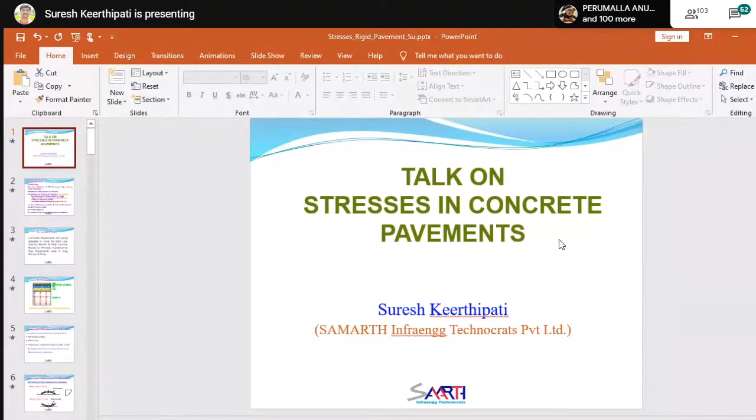Are you seeing my presentation? Yes, Suresh, but you just need to put it in slide show mode. Yes, now okay, fine, good. Go ahead.

I'm going to present only on the stresses in concrete pavements due to various load conditions like self-weight of the slab, temperature variation - nothing but temperature gradients from the top of the slab to the bottom of the slab - and the third one was wheel loads.

So in this presentation: the introduction and structural behavior of concrete pavements under various load conditions, then the methods of how to compute and find out the stresses in concrete pavements, and then the latest developments of the computer program KGP Slab 2 with finite element modeling using 8-noded and 20-noded elements, and how that performs.

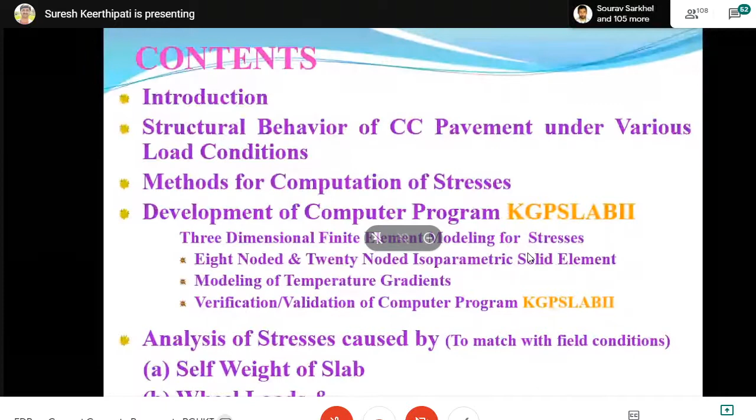And the modeling of temperature gradients. Finally, after the computer program is completed, generally when software is developed, they will do testing. In the same way, here we need to test and validate the computer program which we've written, and then finally analyze the stresses which actually correlate to the field conditions. So these are the topics mainly I'm covering in this presentation.

So coming to the introduction, nowadays concrete pavements are used in both low volume roads and high volume roads to provide maintenance-free pavements over a long period of time. Maintenance-free means maybe a period of 5 years, 7 years, or 10 years. Compared to flexible pavements, maintenance will be very less in rigid pavements, and no maintenance for long periods. So people are preferring to go with concrete pavements nowadays widely in the country.

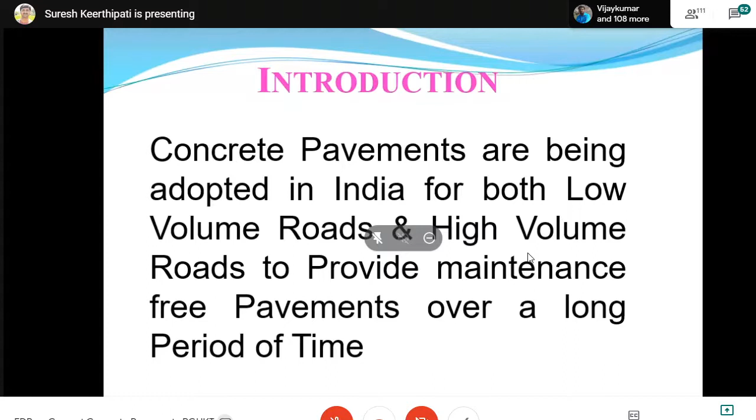Various state governments, central government, or private agencies are also doing this. So here I'm presenting a typical crust which is normally used in high volume roads.

There will be a subgrade of 500 mm compacted to the compaction levels specified in the guidelines, and over that a drainage layer, which is the most important layer, called GSB, granular subbase. Over the top is a DLC layer because we require a strong foundation beneath the PQC to stand alone without any deflections or deformations. And over the top, we provide a separation membrane.

125 microns, you call it a plastic sheet generally. Over the top, we are laying the PQC, rigid pavement of 250 mm to 300 and 320 mm. Because of this separation membrane, frictional stresses will reduce.

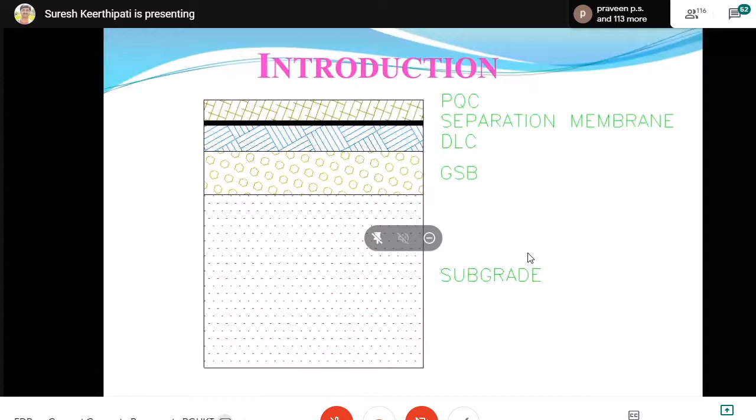A separation membrane is introduced between the concrete pavement and the DLC. Coming to the structural behavior of concrete pavements with various load combinations, firstly we need to take care of the self-weight of the slab, how it affects the concrete structural behavior. The second one is wheel loads - under wheel loads, how the CC pavements will behave. Third is temperature variation through the depth of the slab, which is nothing but a temperature gradient, not the temperature differentials.

This is the temperature gradient along the depth of the slab - the top, what is the temperature, and the bottom of the slab, what is the temperature - the difference is called a temperature gradient. The fourth one is shrinkage of concrete at early age of construction, and fifth is volume changes in foundation. These last two have less influence on the stresses in the concrete pavement, so we are neglecting these two in this discussion and focusing only on the top three.

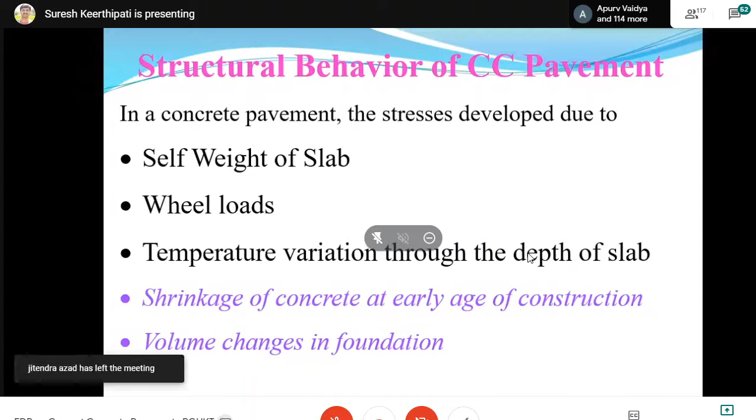These are diagrams - there is always a temperature gradient in the slab. During daytime, nighttime, at any point of time, the slab will curl upward or downward, or sometimes remain in full contact with the foundation or subgrade. During daytime curling, it will be convex upward due to self-weight - self-weight will always be pulling the slab down. Because of this, there is compression on the top and tension on the bottom. This is due to the temperature gradient.

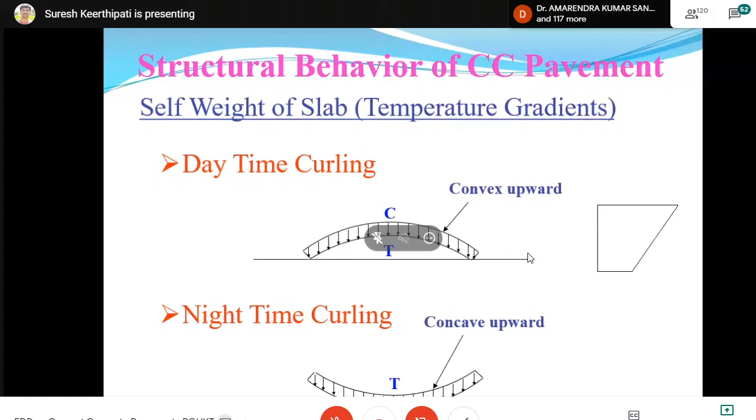The slab will warp like this during the daytime. Coming to nighttime curling, because of temperature drops, the top of the slab will have less temperature compared to the bottom. Then the slab will warp concave upward - just reverse of the daytime case. This is nighttime curling. So temperature will always be there, and because of the self-weight of the slab, stresses are generated at the top and bottom of the slab.

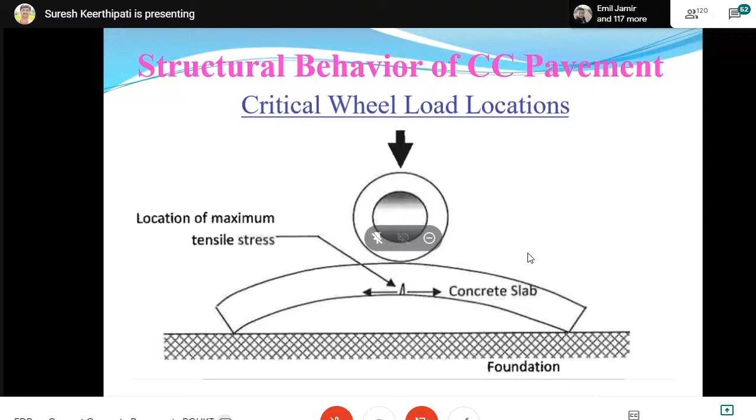Here also, temperature gradients are always present on the concrete slab. I'm looking only at the critical wheel load location - wheels placed exactly at the center of the slab. This is the critical case for bottom cracking during daytime - tension at the bottom, compression on the top. During nighttime, the slab will curve upward, and these are the two critical load locations - if placed here, cracks will occur here. So tension will be on top and compression on the bottom.

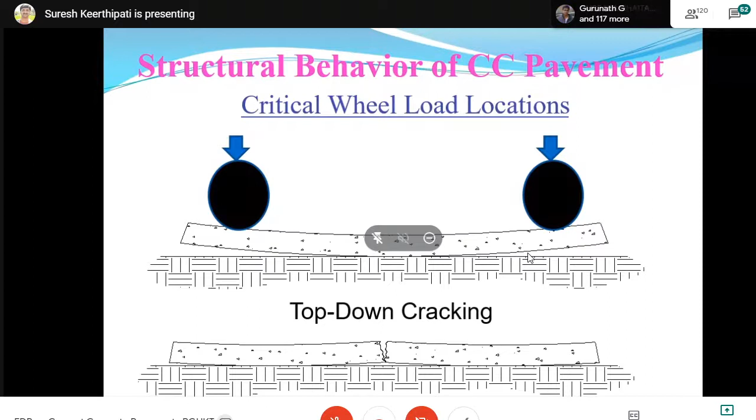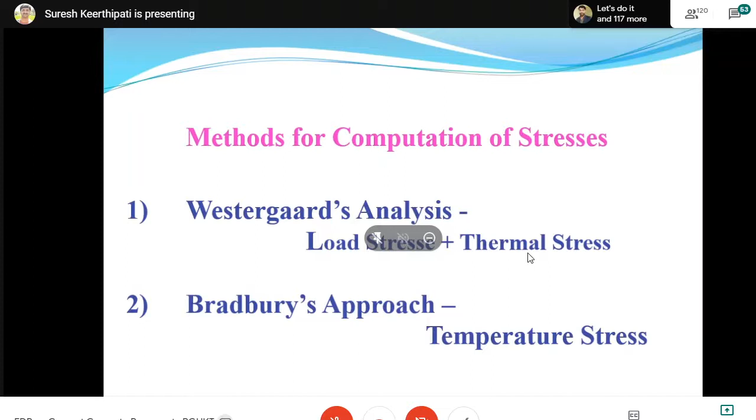So first I will go with the Westergaard analysis for load stresses. What are the limitations and assumptions he made in the analysis? First, he assumed the thickness of the slab is constant, and second, each panel of the pavement is assumed to be fairly large and as yet uncracked - he took long and broad slabs that are uncracked. And the load is assumed in no case to be close to more than one edge or joint, only at one edge or joint.

Other edges or joints are assumed to be far enough away to have only a negligible influence on the stresses directly under the load. This is one of the important assumptions taken. And the third one is that the subgrade is always in full contact with the slab.

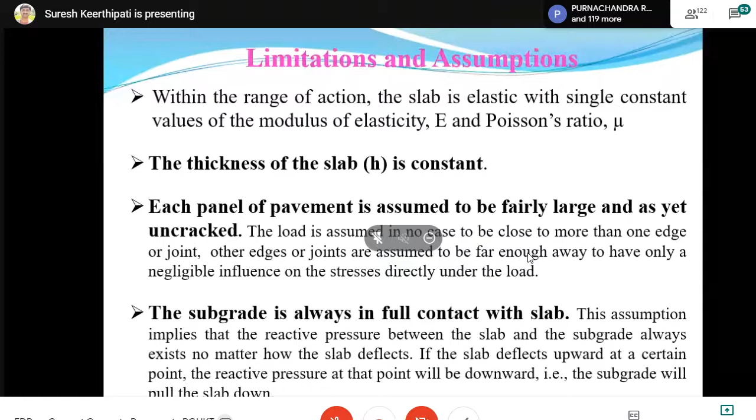This assumption plays a major role in the Westergaard equations. But practically, when the slab warps up or warps down, some portion of the slab loses contact with the subgrade or foundation. So this assumption implies that the reactive pressure between the slab and the subgrade always exists, no matter how the slab deflects. If the slab deflects upward at a certain point, the reactive pressure at that point will pull it downward, meaning the subgrade pulls the slab down. So these are the limitations and assumptions.

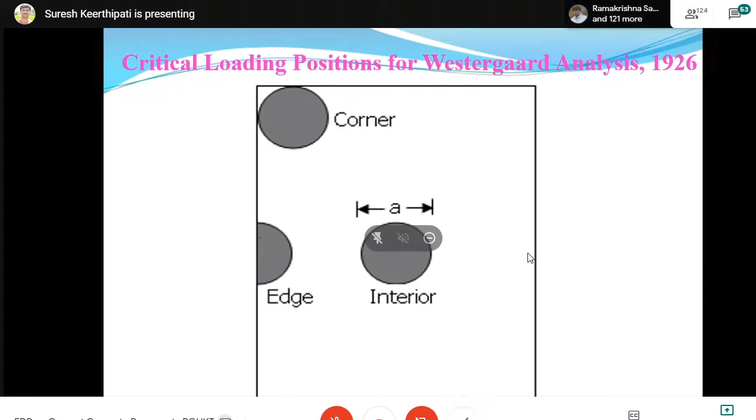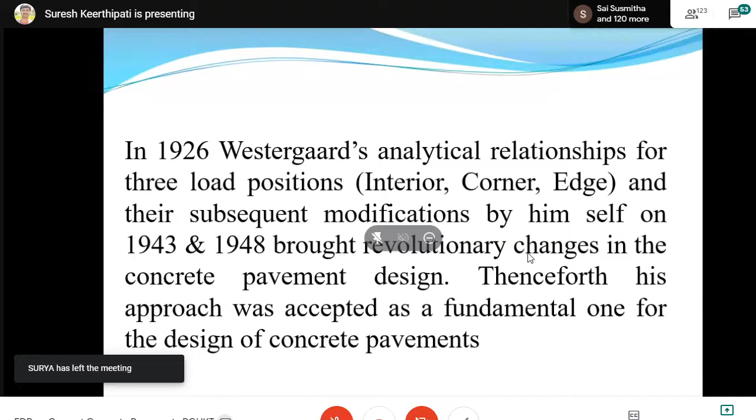With these assumptions, he gave solutions for three cases in 1926: edge, interior, and corner. Later, Westergaard himself revised his equations and modified them in 1943 and 1948 to correlate with realistic pavement designs. Therefore, this approach is acceptable as a fundamental one for the design of concrete pavements. Most countries used the Westergaard equations initially to find wheel load stresses and temperature stresses.

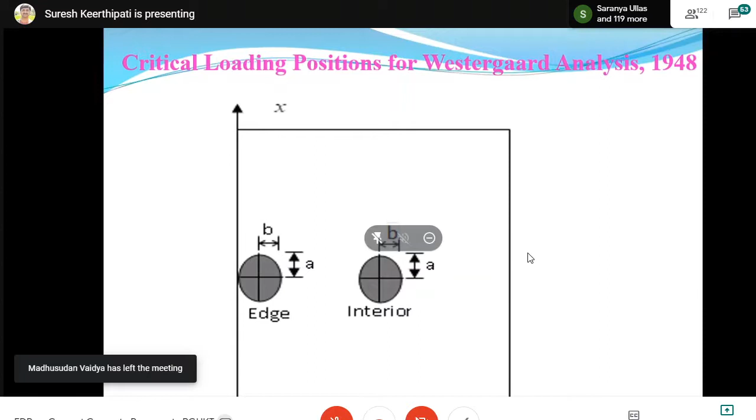In 1948, he himself modified the edge loading. Earlier he took half of the load, now he took the full wheel load at the edge and interior. These are the equations given by Westergaard, and later they were modified by Teller and Sutherland in the 1970s, who gave the equation for edge loading stresses.

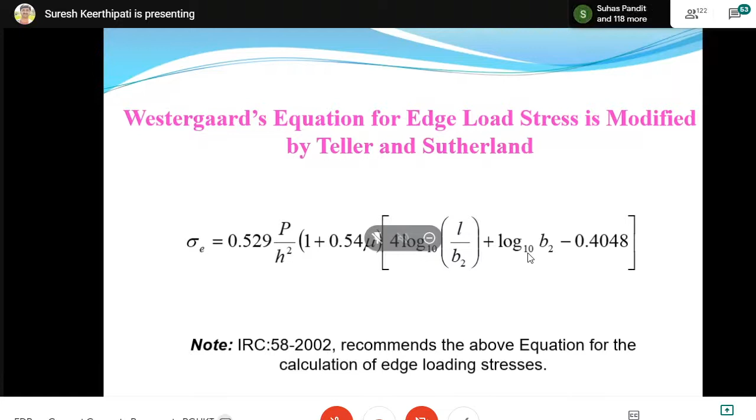The same equation is recommended in IRC 58 2002 for calculation of edge load stresses. For corner loading, again the Westergaard equation has been modified by Kelley, who gave the equation to find the corner wheel load stresses. The same equation has been recommended by IRC 58 2002 for corner loading stresses.

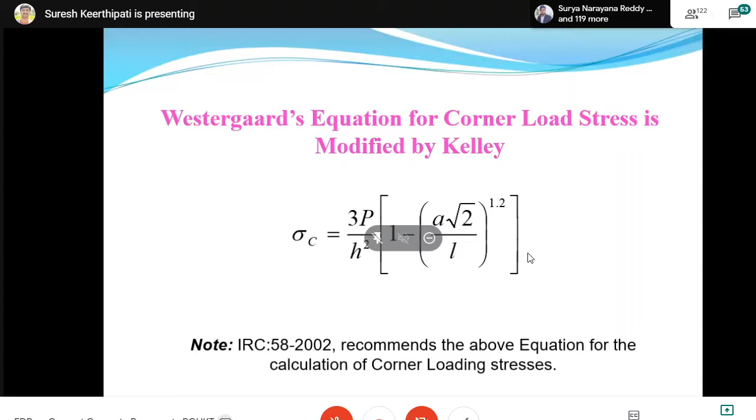Coming to the Westergaard analysis for temperature stresses, he also made some assumptions to find these out. These are the assumptions made by Westergaard in 1926. Temperature varies linearly through the thickness of the slab, but practically temperature varies non-linearly. So he assumed that the temperature varies linearly through the thickness.

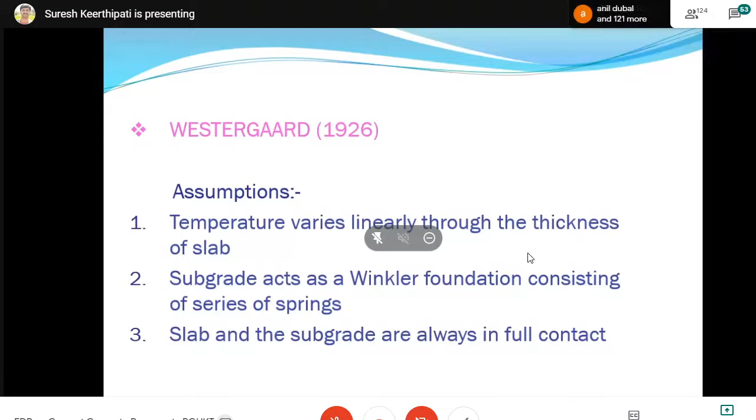Then the subgrade acts as a Winkler foundation consisting of a series of springs. He took a Winkler foundation model for the subgrade. Slab and subgrade are always in full contact, there is no gap when it curls up or curls down, it is always fully in contact with the foundation. With these assumptions, he gave solutions for three cases.

In the first case, the slab is infinite in both x and y directions, meaning long and broad slabs. He analyzed it first with long and broad slabs, but practically only finite slabs are used in the field. Initially though, he took long and broad slabs and gave the moments and tensile stresses for the slabs in x and y directions.

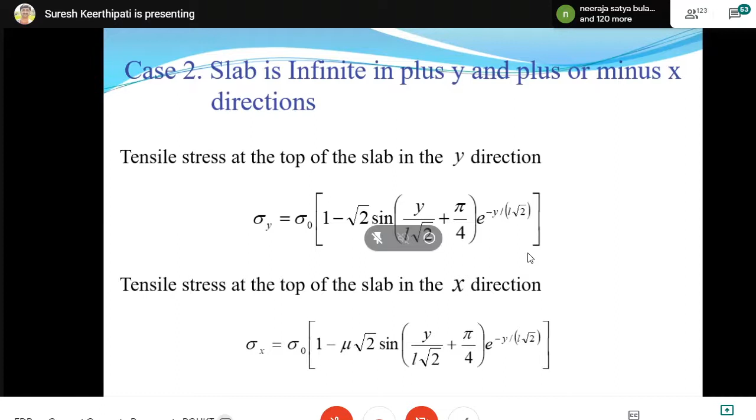Case 2 is when the slab is infinite in plus y and plus or minus x directions, meaning infinite in plus y while minus y is finite. He gave the solutions for tensile stresses in the x and y directions. Case 3 is when the slab has finite width, two directions fixed as finite width and infinite length, and he gave two directions as infinite. Accordingly, he gave equations for tensile stresses due to temperature in the x and y directions.

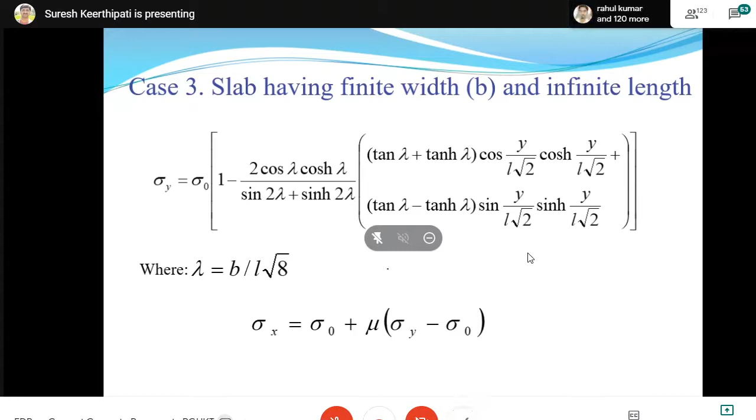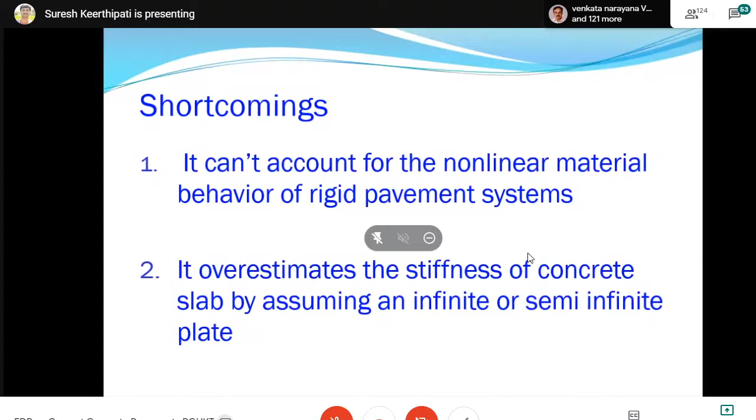There are some shortcomings to following the Westergaard equations. It cannot account for the nonlinear material behavior of rigid pavement systems, and it overestimates the stiffness of the concrete slab by assuming an infinite or semi-infinite plate. These are the shortcomings. Later, Bradbury came into the picture and gave equations simplifying the Westergaard formula. He modified things and introduced the Bradbury coefficient so that the Westergaard equations were modified.

Bradbury considered slabs as finite, and he introduced coefficients for simplicity, because practically slabs are finite only. You see 3.5 by 4.5, or 4 by 4.5, or 4.5 by 4.5 - there are finite slabs only. For that purpose, he introduced one coefficient for simplicity to calculate the temperature stresses.

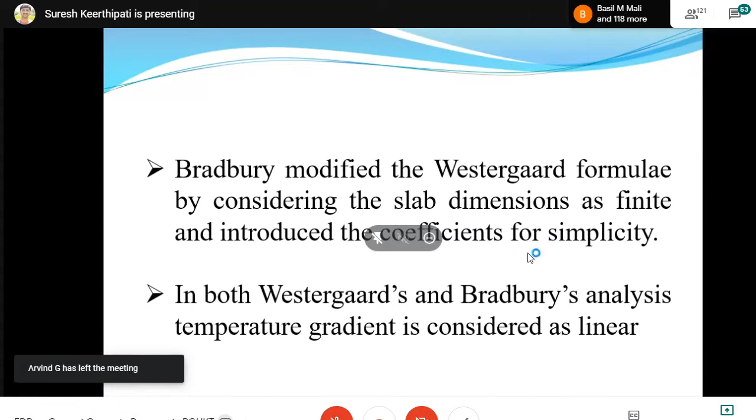In both Westergaard and Bradbury, the temperature gradient is considered as linear. There is no non-linear analysis here. Both of them used a linear temperature gradient along the depth of the slab.

If you see this slide, limitations of Bradbury - here also he assumed the springs always contact with the slab when it curls upward or downwards. See the springs here, so always in contact with the foundation. The slab is always in contact with the foundation. This is the main assumption, and subsequently we will see how this changes practically.

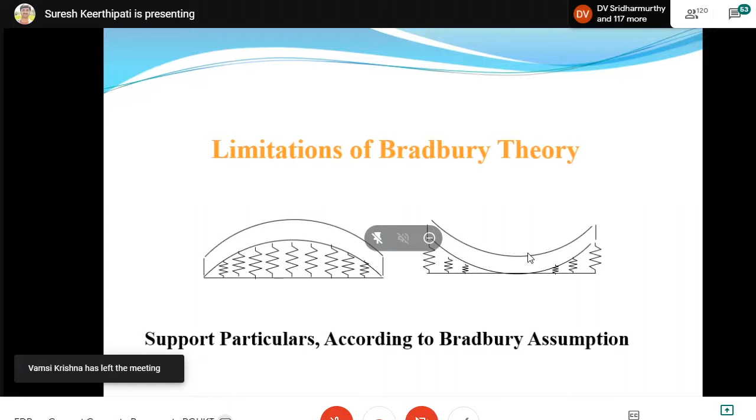So he gave the equations at the edge and interior cases. These are the popular equations. Even in recent times we are using this, with the introduction of the Bradbury coefficient to the temperature stresses.

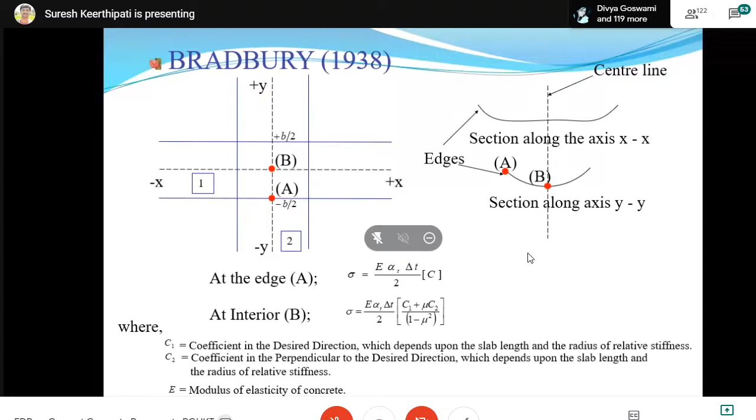And if you see the shortfalls - IRC 58-2002 also recommends the Bradbury equations. What are the limitations of IRC 58-2002? Wheel load stresses and temperature stresses are linearly additive. It means you calculate the wheel load stresses separately with Westergaard or some other available charts, and the temperature stresses separately with the Bradbury equations, and then you club up both to find the maximum stress. This is the limitation of IRC 58-2002.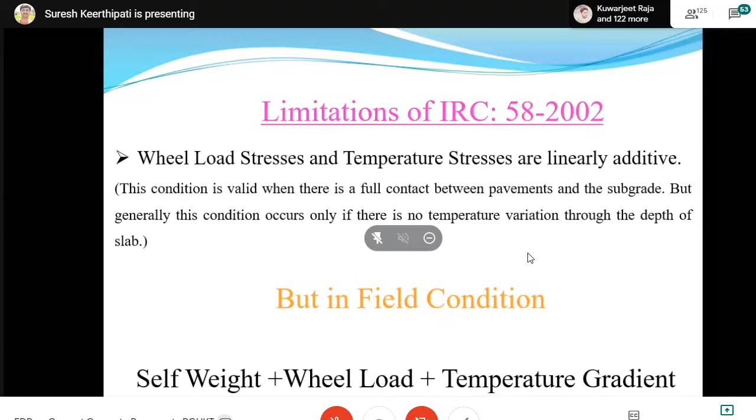So with these limitations, how do we overcome them? The only solution available is to go with computer programming using three-dimensional finite element modeling. There are many three-dimensional finite element models available in the industry to correlate with the actual field conditions and behavior of concrete pavements.

So here I am going to cover the computer program developed at IIT Kharagpur, named KGP Slab 2, written in Fortran. The program models a finite slab of whatever size you want - 3.5 by 4.5, 4.5 by 4.5, whatever - and it rests on the Winkler foundation, allowing wheel loads as well as thermal loading, wheel loads and thermal loading simultaneously at the same time.

And it takes care of full subgrade support as well as loss of subgrade support - meaning full foundation support, or if it loses some foundation support due to thermal loading, the program takes care of this. Now I am going to show how the program has been developed, how it is validated, and how stresses are found from the computer program.

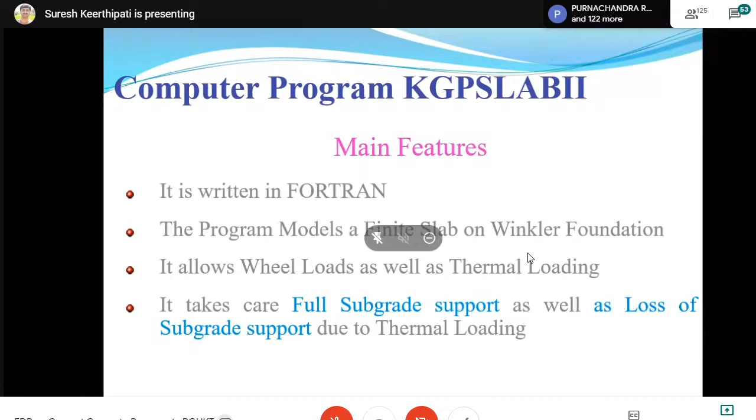Coming to computer program development - the computer program has been developed with two elements. One is the 8-noded element and another the 20-noded element. You see here the 8-noded isoparametric brick element - we have 8 nodes here.

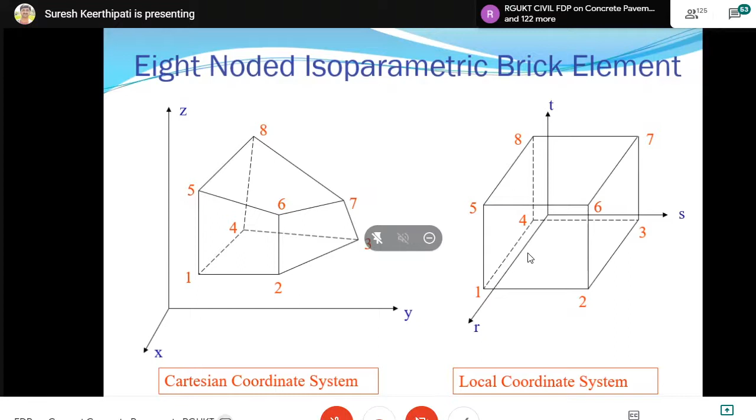1, 2, 3, 4, 5, 6, 7, 8 - these are the 8 nodes available. This is the local coordinate system, and this is the Cartesian coordinate system. If we go to the 20-noded isoparametric brick element, there are 8 corners or 8 nodes, and then every midpoint has another node introduced - 9, 10, 11, 12 - it comes to 20 total nodes here. So this is the Cartesian coordinate system.

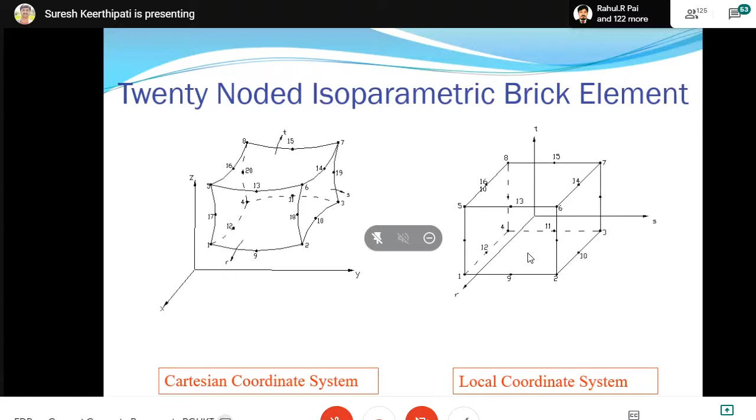With these two elements, we verified the computer program - 8-noded and 20-noded brick elements - against available theoretical solutions, so that we could check whether our computer program is giving good results, correct or not. We will validate the computer program.

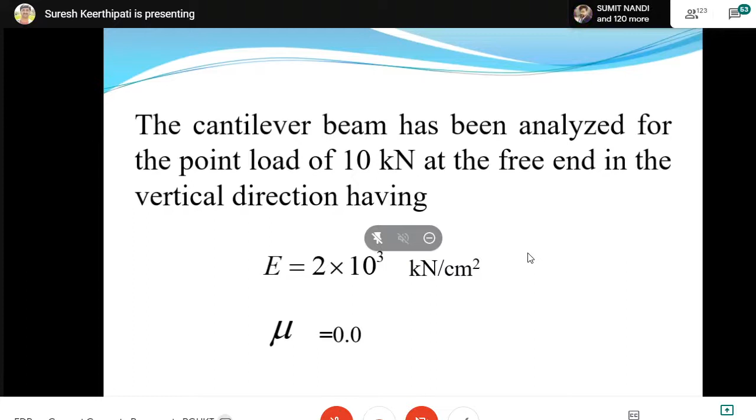In this process, we took a straight cantilever beam loaded with a point load of 10 kilonewtons at the free end in the vertical direction, with E equivalent to 2 into 10 to the power of 3 kilonewtons per centimeter squared, and mu equivalent to 0. This cantilever beam is divided into 3 elements.

In each case - the 8-noded case also 3 elements, the 20-noded case also 3 elements - and 5 elements in the 8-noded as well as in the 20-noded. You can see it here: this is the 3 elements, this is the 5 elements.

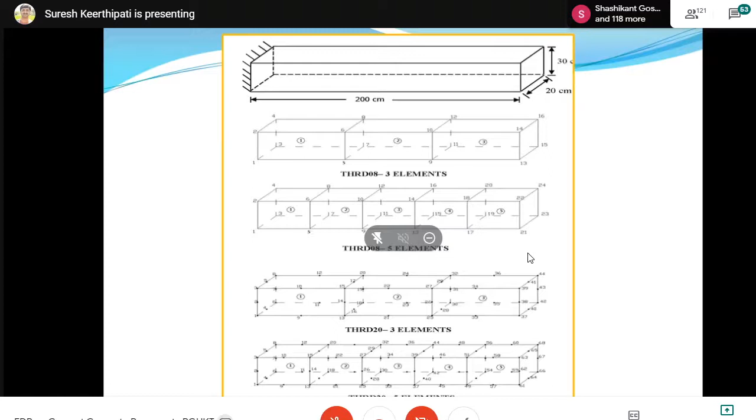These are the 3 elements for the 20-noded, and this is the 5 elements for the 20-noded. And we find out the deflections and the moments it is giving.

If you see this slide, the comparison of vertical deflections from the free end, means at the free end, deflection will be more in the cantilever. Theoretically, if you calculate, it comes to 0.2963. If you see here the results of 3 elements, 5 elements of 8-noded, or with 20-noded, 3 elements or 5 elements, it's coming the same, more or less. There may be a difference of 3 to 4%, not more than that. Sometimes it is giving 100% absolutely same as the theoretical and with the computer program.

But if you see the comparison of bending stress, it will be more on the fixed end of the cantilever beam. At the free end it is 0. So in the same way, we got the results also with the computer program compared with the theoretical values. Absolutely, it is matching with the theoretical values of the computer program.

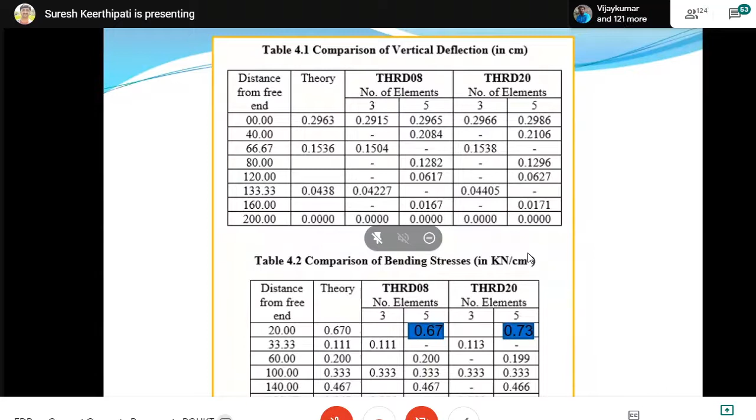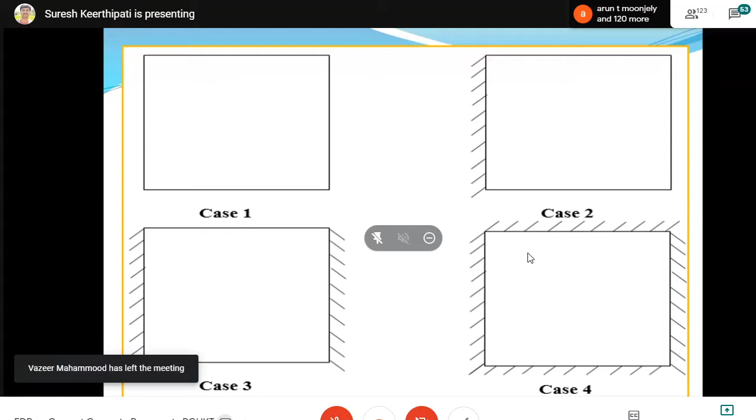So going to another validation, we did the validation of the program in the plates with different edge conditions. If you see here, there are 4 cases. Case 1 is simply supported. Case 2 is fixed at one edge and 3 edges are free. Case 3 is fixed at 2 edges and the other 2 edges are free. Case 4 is completely fixed - all 4 edges have been fixed - and we calculated the deflections on this, and these are all tabulated.

This is the example which we have taken. There are so many validations that have been done. I am showing you only 1 or 2 just to show how the program is to be validated.

So we took a 2 meter by 2 meter slab rested on a rigid foundation, having modulus of elasticity 3 into 10 to the power of 5 kg per centimeter square, Poisson's ratio 0.3. The entire slab was loaded with uniform pressure 0.1 kg per centimeter square, and the thickness of the slab has been taken as 15 centimeters, for thin slabs.

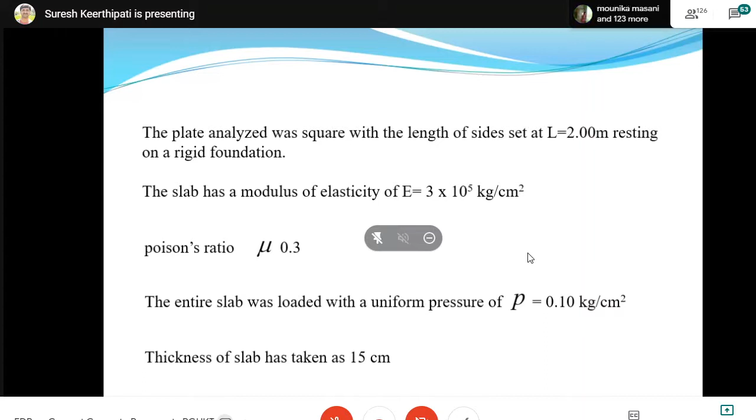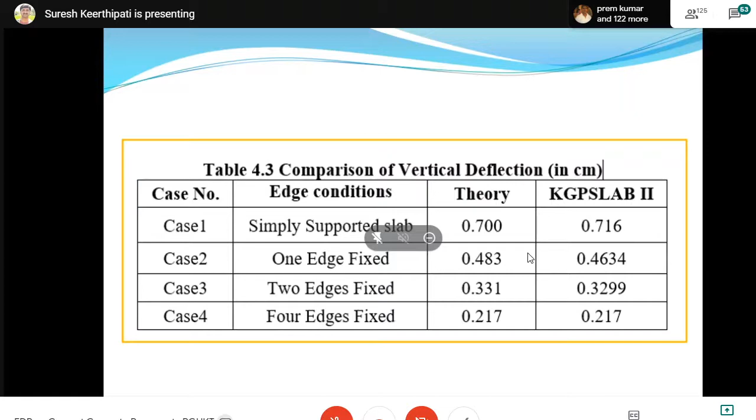So during the analysis, this is one of the findings for why we went for the 8-noded and 20-noded programming - because if you go with more nodes, maybe it gives more accurate values. That was the thought. We thought we would go with first 8-noded and 20-noded, then compare both models to see which is giving the best results, and do the analysis with that one.

So during the analysis, it is found that the 20-noded program is taking greater time compared to the 8-noded program - maybe 3 to 4 times more than the 8-noded programming. But this may be because the 20-noded element program has a larger amount of data in the form of nodal data and nodal connectivity as compared to the 8-noded element program.

Then we came to the conclusion of which element we need to take, 8-noded or 20-noded. Then we did the comparison of 8-noded element and 20-noded element subsequently.

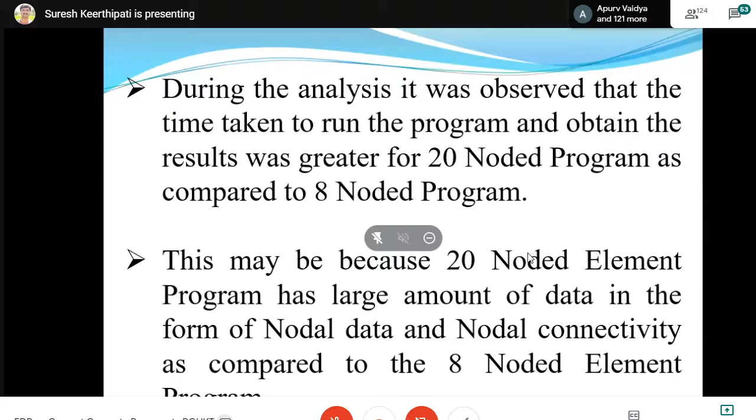We took a slab resting on the Winkler foundation, with the finite slab width and length also 3.55 meters - a square slab - and we took single wheel loads varying from 8 to 16 tons, meaning 8, 9, 10, whatever you want to take. 8 to 16 we varied with increments of 2: 8, 10, 12, 14 and 16 tons.

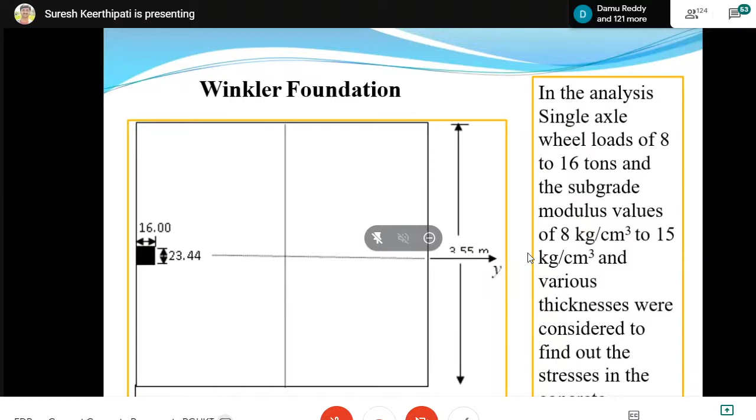And for the subgrade modulus of reaction we took 8 to 15. And for the various thicknesses - 200mm, 250mm, 260mm, 280, 290, 300 - we did the various analyses with the 8-noded element and with the 20-noded element, finding the stresses and the wheel loads.

And this is the beautiful result that came in both cases: 8-noded, 20-noded, the results are more or less the same. There is no much variation on this one. If you take slab thickness of 20 or 30 or 25, with different edge subgrade reactions, K values, if you vary, and with different single axle loads - 8, 10, 12, 14, 16 - this is the 8-noded brick element, and this is the 20-noded brick element.

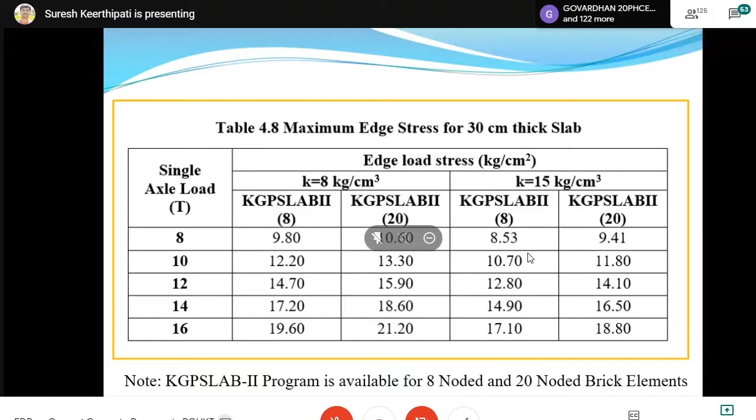There is no much difference in the edge load stresses, more or less same. With the higher modulus of subgrade reaction also, there is not much change between the 8-noded and 20-noded programming. Even for the 30 centimeter thick slab, comparing the 8-noded and 20-noded computer program results, more or less it's matching.

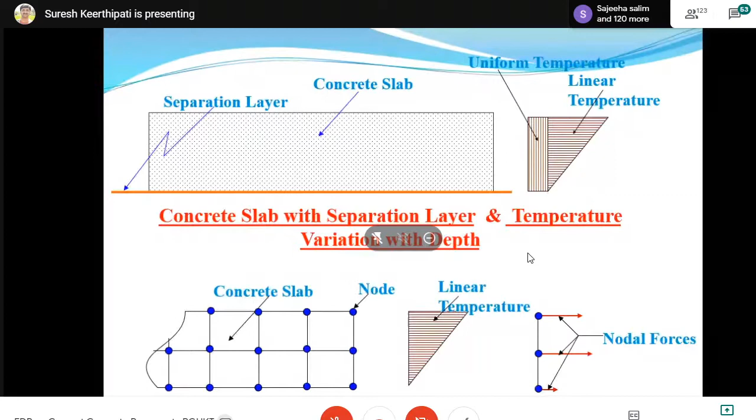This is the uniform temperature change. For example, at morning time, the concrete has uniform temperature all along the depth of the slab, say 25 degrees. Going on to midday, it comes to say 45 degrees on top, and on the bottom maybe it comes to 25, so the change here is 20 degrees.

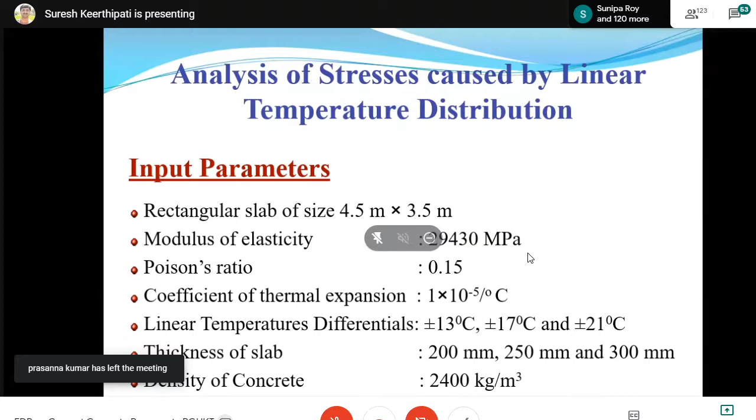Modulus of elasticity 29,430 MPa, Poisson's ratio 0.15, coefficient of thermal expansion 1 into 10 to the power of minus 5 per degree Celsius. With linear temperature differences of 13 degrees plus or minus for daytime and nighttime, then 17 degrees plus or minus, then 21 degrees plus or minus. Thickness of the slab 200, 250, 300 mm, and density of concrete taken as 2400 kg per meter cube.

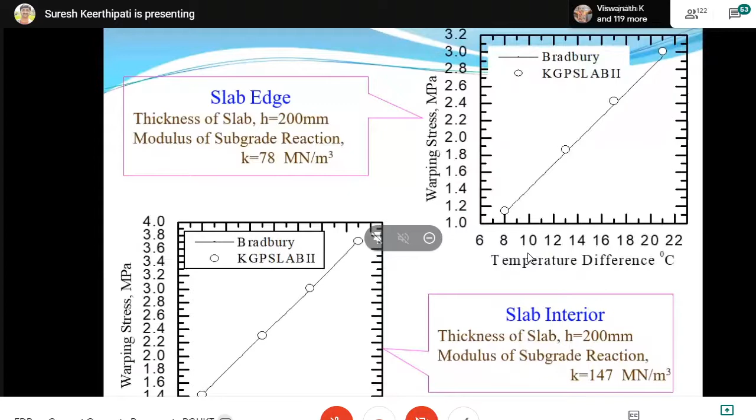I can show you in tabular form, for better understanding, a comparison of edge warping stresses and interior warping stresses at different temperatures of 8, 13, 17 and 21, in daytime and nighttime. You see only a 2% change between the Bradbury and the KGP slab for edge warping stresses, and only a 1% difference between the theoretical and programming values for interior warping stresses, daytime and nighttime. So with this, we validated the program.

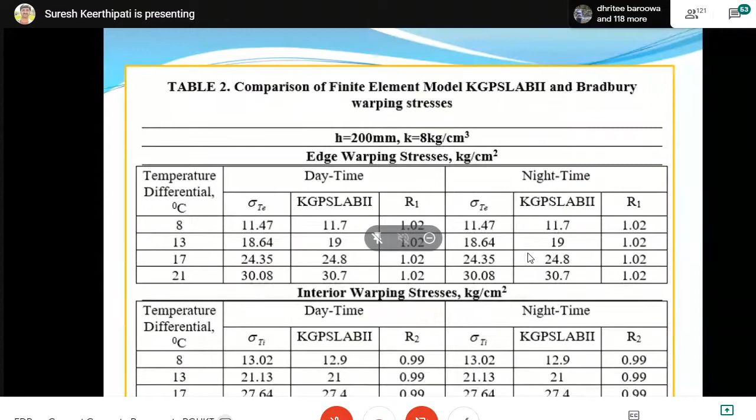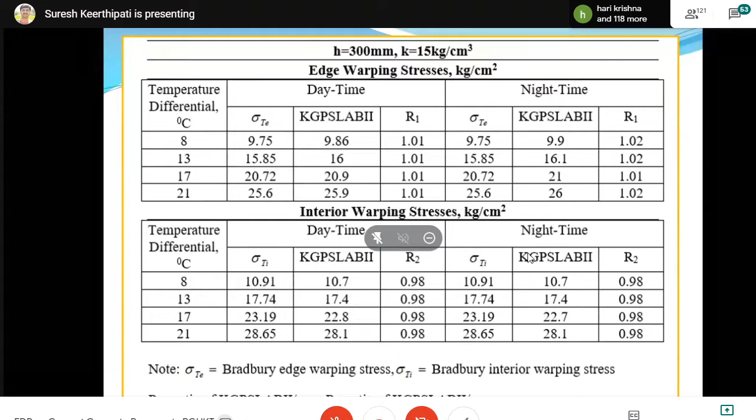For the 300 mm thick slabs also, there is only a 1% difference, and here only 2%. So the computer program can be used for different conditions relating to the field.

With this validation, we went forward and did modeling of the computer program with realistic conditions, taking the self weight of the slab, wheel loads, and thermal loading all together combinedly. There is no separate analysis for self weight, wheel load, or thermal loading alone - all three act at a time.

This is a more realistic model than the Westergaard and Bradbury approaches. The computer program has been modeled for a finite slab on Winkler foundation. It allows wheel loads as well as thermal loading, and takes care of loss of support because of thermal loading in daytime and nighttime, due to the slab curling or warping up or down. Some portion of the slab will lose support with the foundation - this has been taken care of in the modeling.

To measure the deflections, if any deflection is coming in the slab, plus or minus, we remove the spring reaction on those nodes, and the program is run again. It will iterate until no further iteration is required. So first time one node loses support, next time it becomes 2 or 3, and it comes to a standstill, with some nodes in contact with the foundation and others not.

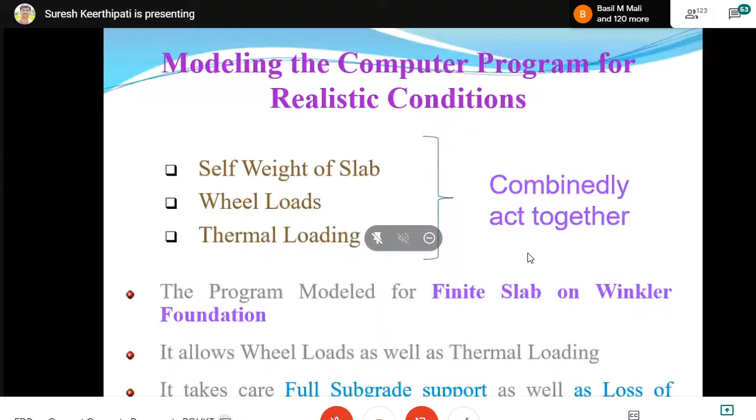This is the more realistic model that has been developed, with extensive research done at IIT Kharagpur. This is based on my thesis only, my MTech thesis, which I completed in 2004. Later on, subsequent research was done with different conditions, but I'm not talking about that here.

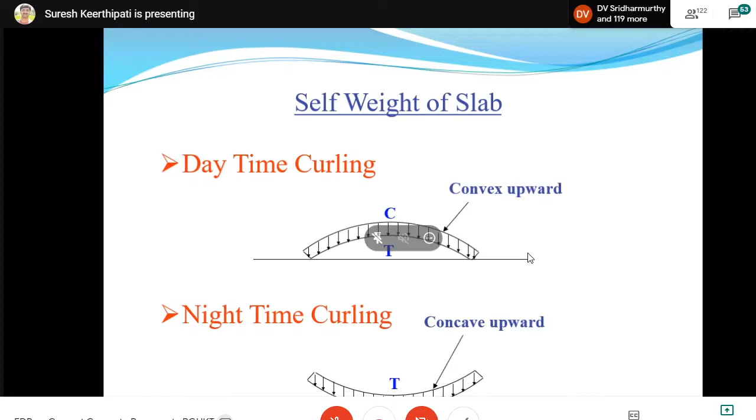Only the basics - how the program has been developed for the self weight of the slab, taking care of the curling during daytime and nighttime. And these are the temperature gradients.

This is the important thing introduced in this model - non-linear variation. If you see here, this is the non-linear variation. Practically also, if you measure temperatures at different depths, from top to bottom or bottom to top, temperature will vary non-linearly.

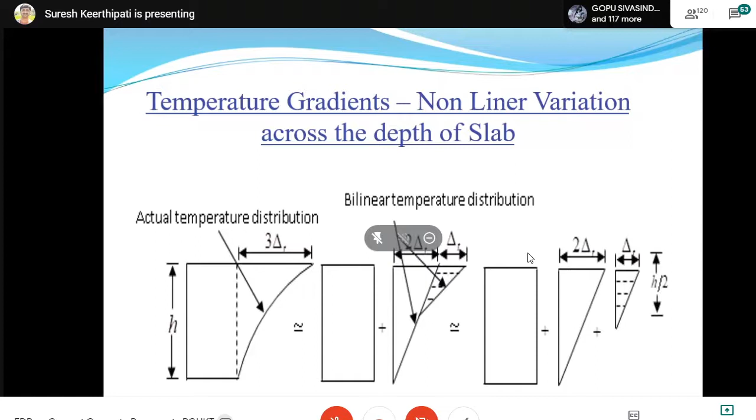This is non-linear, and this is the constant temperature gradient. We divided the term into two parts - one is the constant varying temperature gradient, and the non-linear portion. This non-linear portion is further divided into three deltas - two deltas with full depth linear variation, and one delta with only the top half portion divided. With this, the model was modified to take care of the non-linear variations.

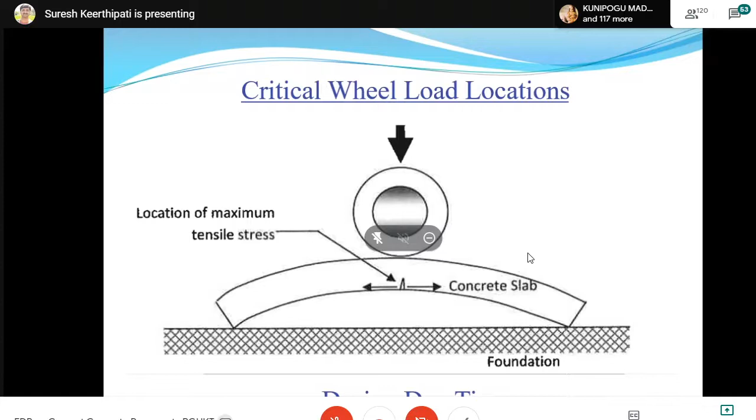This is the critical wheel load which I showed in the initial stage. During the daytime, the slab curls downward, and the wheel load is placed here - this is the critical one. This has been analyzed: tension develops on the bottom, compression on top. This is called bottom-up cracking during the daytime, and top-down cracking during the nighttime. These are the critical wheel load locations.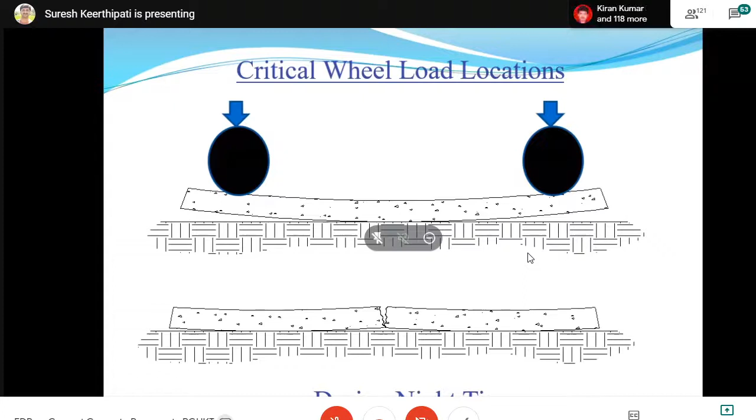With different combinations of wheel loads and different combinations of slab widths - 3.5, 4.5, 3.8, 3.9, 4, 4.5, or you can take 3, 3.5, whatever you want - you need to set the dimensions initially in the program itself. Accordingly, you need to make the elements in the programming, and then it will take care of the length and width of the slab.

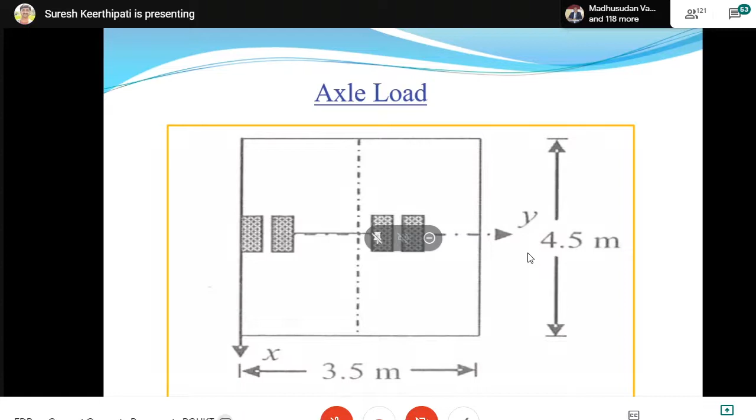And these are the axle loads - different combinations: single axle, tandem axle, and tridem axle. These are the maximum stress locations where you will get stresses due to the wheel loads.

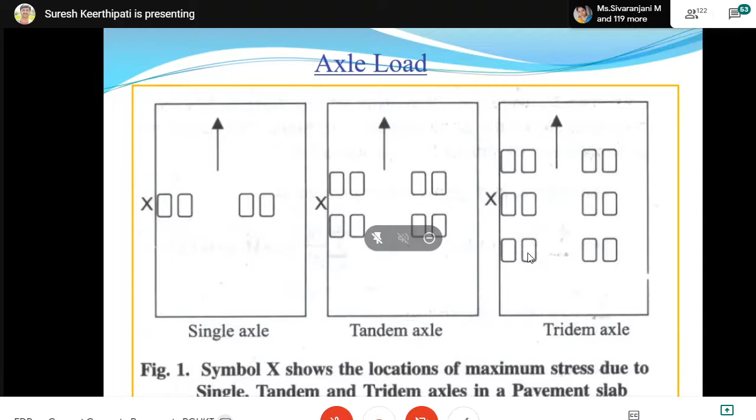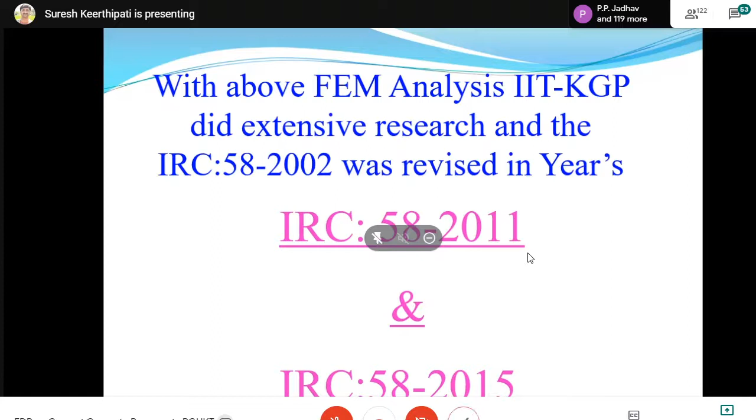With this above FEM analysis, IIT Kharagpur did extensive research, and the code book was revised in 2011 and 2015, as IRC 58 has been revised. There are some limitations of the approach and need for future work. Why I am presenting this is that a lot of research is still required, even though most things are covered—mostly I can say 80 to 85% accuracy we achieve. There is a lot of research required for the other 10 to 15% to get more accurate results. Plenty of research is needed to determine the modulus of subgrade reaction K for different types of subbases for the pavement.

There are different types of subbases, and the subgrade reactions are different for different subbases, which need to be validated. The assumption of DLC subbase with a plastic sheet on Winkler foundation may not be correct, because DLC has higher shear strength, so Winkler foundation does not exactly fit the practical case. We need to model the foundation as a solid elastic mass—this is more realistic. We need more research on this, and also field tests such as FWD are necessary to get better parameters for pavement design.

Temperature is one of the most important factors in finding out stresses. Temperature and moisture distribution in the concrete slab must be studied all over India for correct evaluation of stresses. We only have charts in the IRC that are state-wise or region-wise, but these may not reflect actual field temperature gradients. This requires a lot of research on temperature gradients. Then the reliability concept needs to be built into the design. If these issues are overcome, our models will be stronger and correlate better with field conditions.

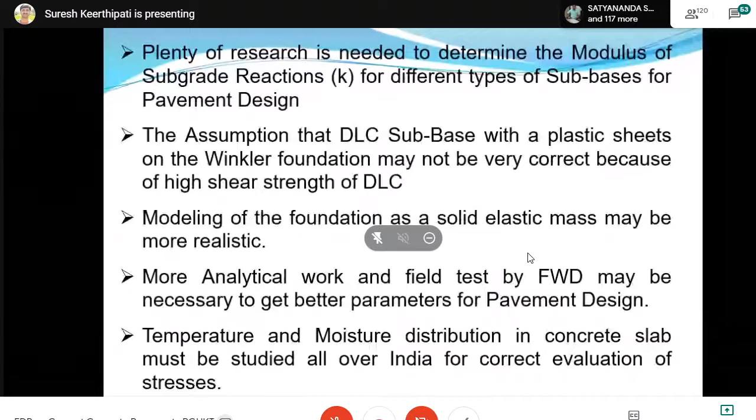With this, I'll take your leave. Thank you.